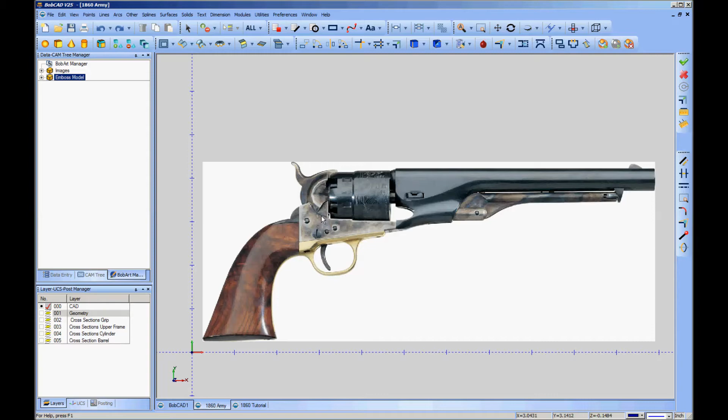The image that we're going to use in this case is one of a Colt Model 1860 Army Revolver. It's a black powder percussion revolver.

Using the basic drawing tools in BobCAD, we're going to draw out all the various parts. We're going to draw some geometry to reflect the topology of the part. There are some complex curves to be modeled here, quite a few of them that you can see.

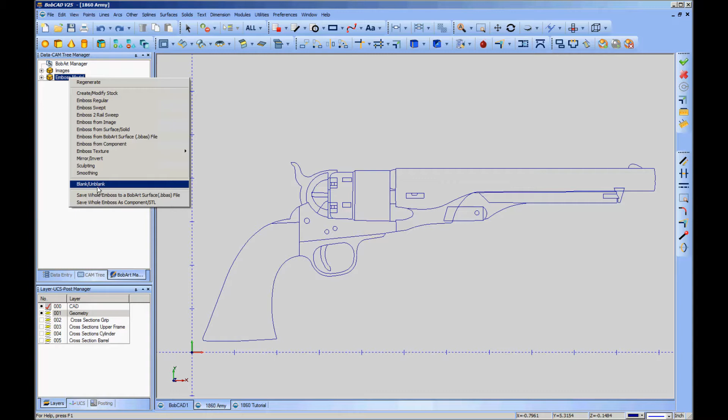Once we've done that, and we have a decent set of bones to work with, we're going to use BobArt, and only the basic BobArt, by the way. I'm not going to use Pro to actually do any of this, although along the way I'm going to point out some of the features of Pro. And we're not going to use every tool within BobArt to do this, by the way. I'd say maybe a third at the most of the tools available in BobArt are really even needed for this part.

But when we're done, we're going to have something very similar to this. This is the test piece, the one that I did originally, and I'll be drawing on my experience making this one to do the one that's in this tutorial.

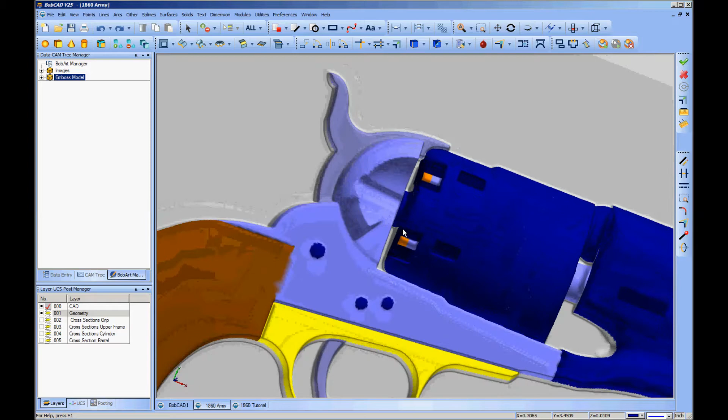As you can see, it's fairly detailed. I'm down to the percussion caps, the pins, the percussion cap chute there, the pins holding the barrel assembly to the frame, the charging lever. Pretty much everything a growing boy needs to go out and, I don't know, shoot at cans, I guess.

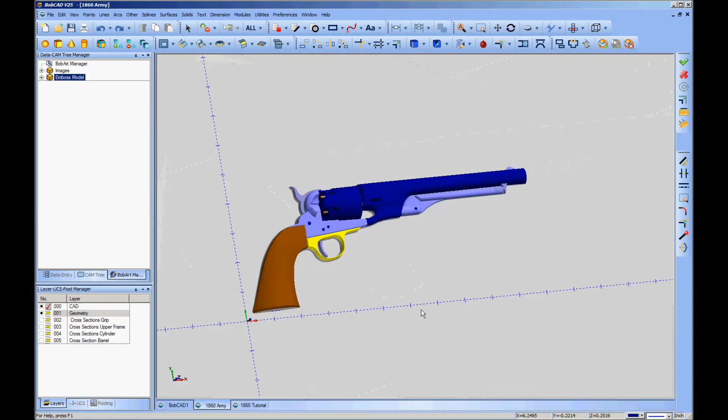Anyway, from here we will go on into the first part of it, which is going to be taking the image and delineating the parts and topology using the basic drafting tools with BobCAD. We'll pick it up there.

Alright, I've gotten started on the geometry for this piece. One of the first things I want to do is just discuss the tools that I'm using for this. They're the basic drawing tools, but this is the set that I find most useful for doing this sort of thing. I've got them set up in their own little toolbar over here.

I usually use them for cleaning up vectorized geometry. First of all, line sketch, simply drawing a line somewhere - nothing really to that. Quick trim is for getting rid of geometry when I cross two lines then join them, and I've got the tail left over. I'll use quick trim to get rid of that. It's very handy.

Break divide is wonderful - turn this off for those times when you join this point and only then realize, oh man, I've got to put an intersection down there because I've got to join this line to it. Well, you hit break divide, pick this large line, break it into two pieces. That gives you a vertex, which you then can take grab corner or drag corner, drag it to the appropriate spot, and there you've got a joining point for your line.

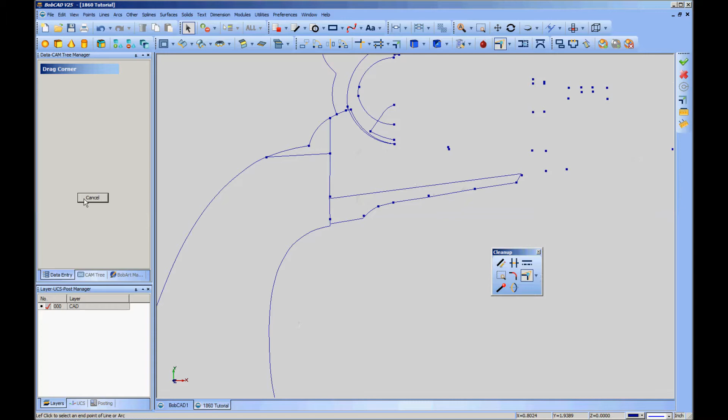That's very useful in places like this where you've got lots and lots of little lines intersecting to delineate the various points or the topology.

Let's see, the other things I wanted to mention, of course, line join, for when you've put that vertex there and you want to join it with the end of another line or a point that you've put in place to define this break between the two separate parts in the assembly.

And last, deform contour. Deform contour is incredibly handy when you can very easily spot a point here and a point here and join a line between them, and then using deform contour you can take your straight line and just drag it right out to whatever you need.

And that's the basic tools, and I keep them parked over here in their own toolbar.

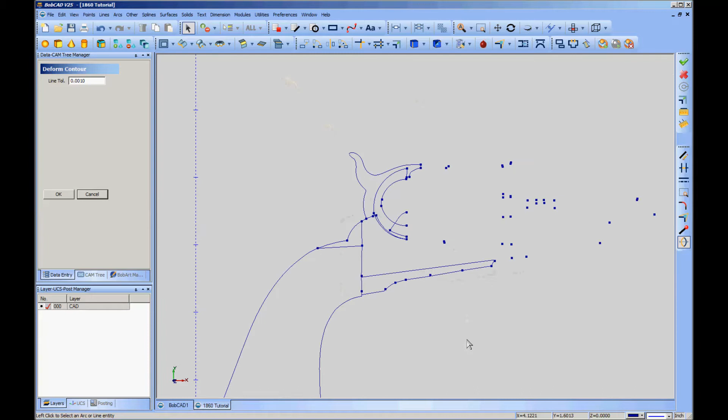Let me go ahead and show you where I'm at this point. I've used a few splines. I really limit splines to places where I know for sure they're not going to be broken, because when you draw a spline, in order to break it you basically have to explode it.

And what you get is a million little line and arc segments, and you don't need that. Nobody needs that. That clutters up your drawing - well, it doesn't clutter it up.

It basically throws a very large load onto your computer in order to lug around all those little parts. To the computer, this spline isn't really much more complex than this little piece right here. But if you break it up into 1,000 of them, that's 1,000 of these added to your drawing.

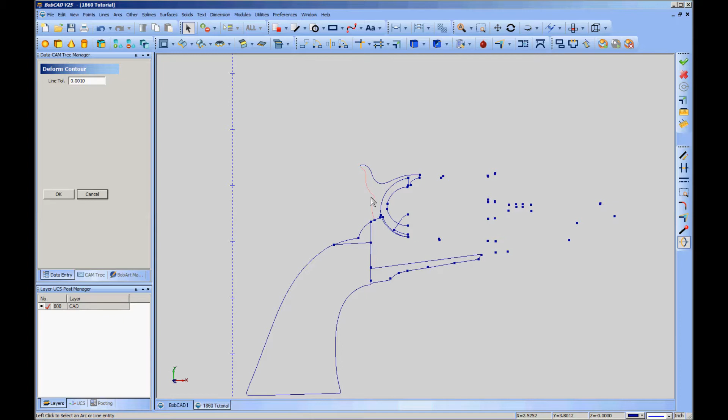So I'll limit that. I've got a spline here at the top of the hammer, one defining the back of the hammer, one defining the entire grip. I'll almost certainly make a spline to do the inside and outside of the trigger guards. Places like this compound curve on the charging lever is a good place for a spline. Also, this flat on the side of the barrel toward the rear will be defined with several splines, because I've got some compound curves that I need to define rails for an embossment there.

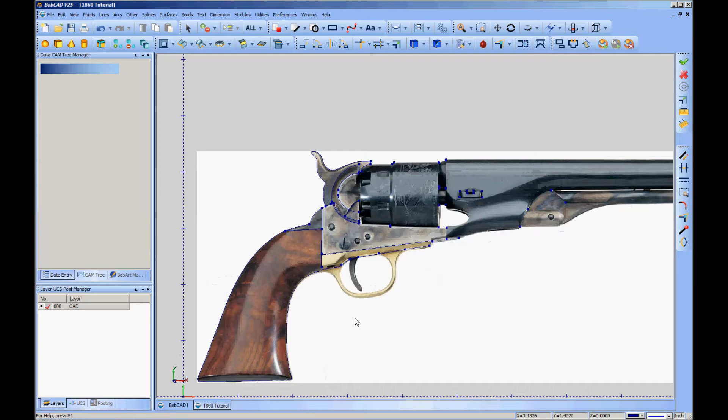Let's see. Alright, one of the things I wanted to talk about right off the bat is how what you're doing here differs from your normal CAD drawing. What you see right here is a bleeding mess. If this were CAD, I would deserve to get thrown out of the room for drawing that. It doesn't make sense. It's not something that you would do.

However, it does make sense when you're just putting down geometry for an embossment. If I'm going to define a curve... actually, let me go ahead—well, I don't have the setup properly for doing the embossment right now. If I were going to define this curve, which is essentially a spherical part that's been cut in half where the hammer comes into it, and it's got a scallop cut out of the side, the first thing I've got to do is define this curve, and then I've got to emboss it.

In order to emboss it, I'm going to emboss down below where this side plate goes, right through this area where the part is cut away. Later on, I'll take this roughly triangular area and have a separate embossment that will just mash it all down flat to the plane where my cursor is going. This embossment will ride up over the part that goes down along this line.

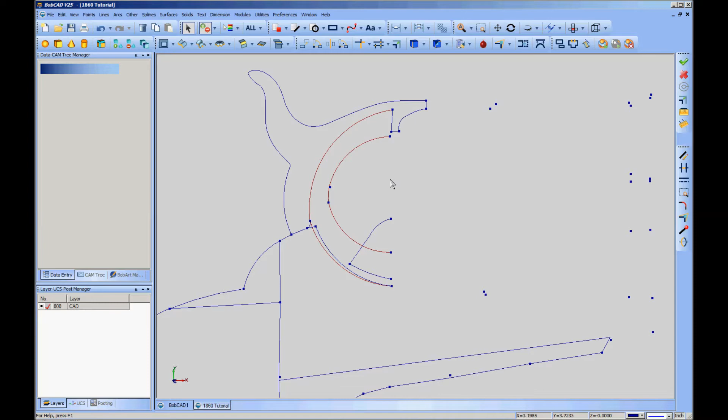So you run into situations like that where, in drawing out the part, you have to think about what all parts do I have, and separate them out into embossments mentally. So I've got this one embossment that is actually going over and impinging on not one but two other embossments. Inside that, I'll have a second embossment that'll cut out the scallop, and I'll even have a third one to take this little groove, which is the guideway for the percussion caps that fit down onto those nipples.

Oh, and while I'm talking about this, one other thing. This is a photograph of a modern Italian replica of an 1860 Army revolver. It's really faithful except for one thing—see that screw right there? When I look at a photograph of an actual Colt 1860 Army revolver, which is a pretty good photo, and I found this after I'd started the other one, there is no screw there. These pins are in the right place, but no screw. So I'm not going to have that as part of the embossment. I probably won't mention that again, but when you notice toward the end that the screw is missing from the image, well, that's why.

Okay, I'm going to go ahead and draw some more offline, because it'll bore you to tears if I'm just sitting there connecting lines and tweaking curves. And when I come to some interesting tasty bits, like when I start doing this compound curve especially, we'll come back in and do some more narration.

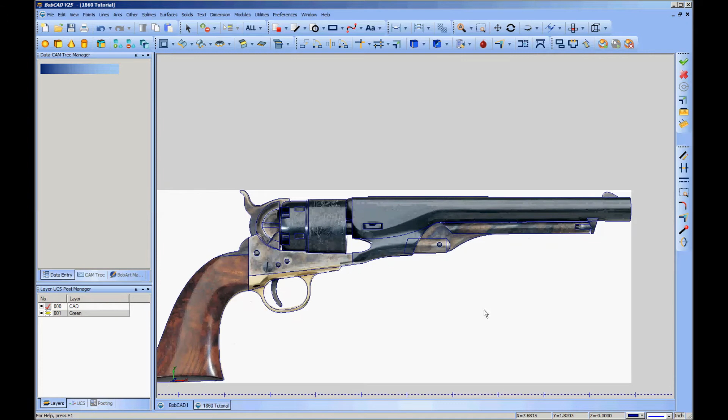This is actually a muzzle loading black powder revolver. A lot of people don't even realize these existed. But before the advent of the Smith & Wesson, I believe, actually did the first 44 caliber cartridges, and then Colt followed on very shortly thereafter. Until then, if you wanted a lot of firepower, you carried more pistols. You didn't reload in combat because you would be dead.

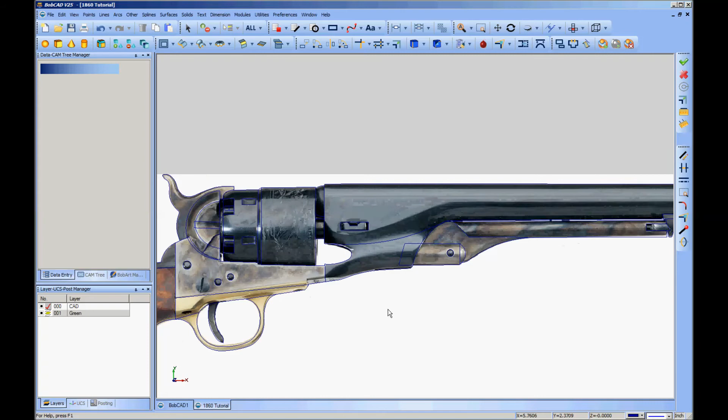Anyway, this plunger, in order to do a quick and easy embossment, I went ahead and pushed it within the frame, the geometry that is, because I'm just going to do a regular emboss with a convex arc. It would look funky back here if I just tried to stop it there, so I pushed it within the frame. The other thing to note is on this barrel, we've got several features that we've got to emboss.

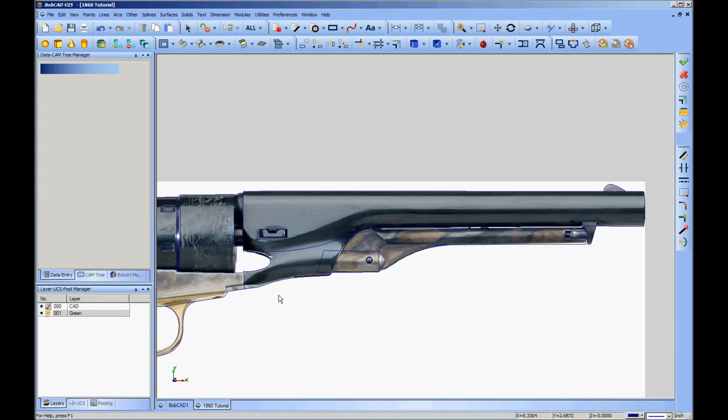We've got, of course, the round barrel. We've got the flat on the side here. We've got this concavity that runs fore and aft. And we've got a pretty inconvenient little cutout here. And all of that pretty well has to be modeled to make this look right.

So first things first, got the barrel drawn out, and I threw a spline in here that doesn't really correspond with anything. What it's for is, as the round barrel comes back, I'm just going to swell it all out, kind of pear-shaped here, full round the whole way, and it will be basically bulbous in here. I'll take another embossment and push it down flat, and then there'll be a third embossment, which will be basically this part here merging just straight over into the larger barrel piece. That'll provide everything except the concavity.

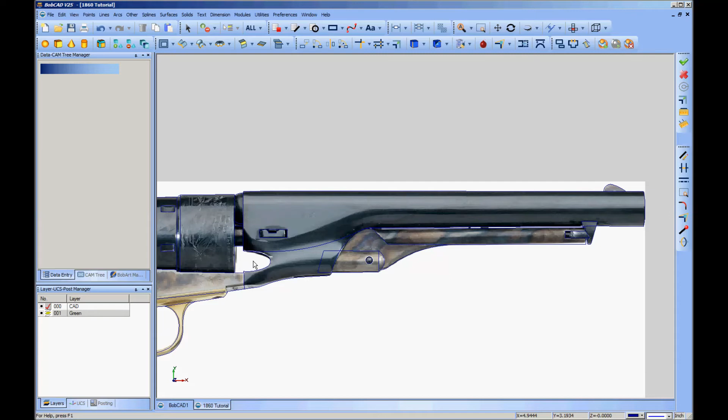That'll be a 1, 2, 3, fourth emboss will be the concavity, and then because of the way that will have to work, there will be some oddness going on here. I'll have to have a fifth emboss to just stomp that all flat, and it'll be an emboss, but it'll look like there's no emboss. So anyway, I've got the definition of the main barrel swell here.

Next thing I got to look at is this flat. Now the flat, obviously the barrel rounds over at the top, so the flat really goes there forward, more or less gets undefined here, but then it swings in and it follows this down. So in order to put that in, I've got a nice vertex right there that I can hook that one to. I'll take a spline up to here, and it'll be close enough.

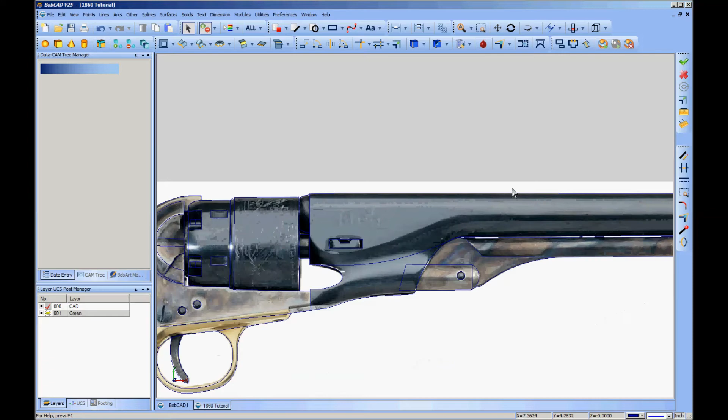There's lots of artistic license or just plain liberties taken with this. I very often say close is close enough. Really good case in point is I'm just going to make this a little billet stuck into the end of this lever instead of trying to model the little spring in there. It's not worth it. Not worth the time of the day.

Okay, so up here I don't have anything to anchor it to, so the first thing I'm going to do is use break divide to split that into two pieces, giving me a vertex I can play with. I'll use drag corner to drag the vertex up about there, and now I can go ahead and take a fitted spline. Holding down the shift key and clicking on that line gives me a vertex I can anchor to, and I'll just start lining right out along this curve.

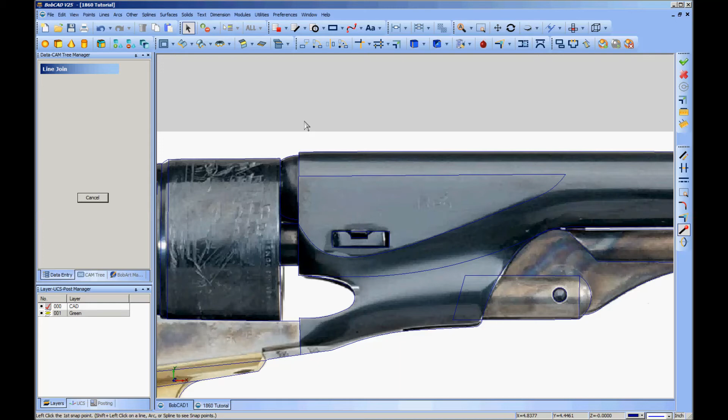I want to miss that securing pin because I will be embossing it. It gets a little undefined in this part, so I'm just going to curve up and right there. And the top part is a straight line, so I'll just use line join, shift and click, gives me a vertex, bring it out here and attach to that. So that defines the flat embossment.

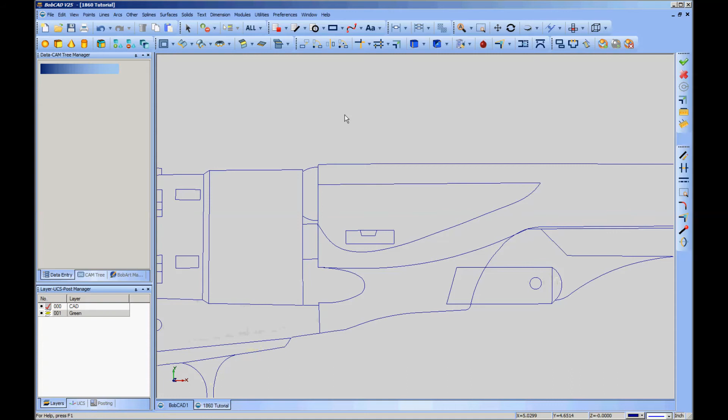Now, one thing I'm going to do while I'm at this is color code these, because I'm going to have a lot of lines in here, and it'll make it a lot easier if I can very quickly, just at a glance, see what's what. So these two, I'm going to select them, modify attributes, color, and we'll make them purple. Not a lot, but you can see it pretty easily.

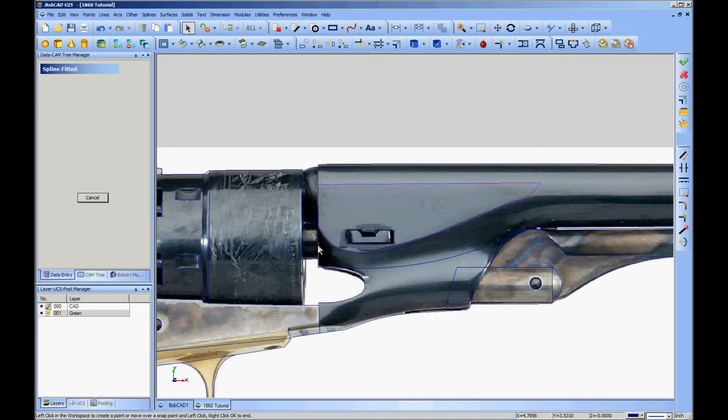Alright, the next thing is to define this piece here. It's going to have to go beyond this line in order to join. So we'll say halfway up that line to there. So I do have to use break divide. Click OK, and that gives me a vertex to anchor to. And again, we'll just use a fitted spline, holding shift to get the vertex.

And this can go way on in, it's not really an issue, so I'm just going to go straight across. Because it'll be color coded, I'm not even going to worry about crossing that pin. And when we get over here, holding down shift shows me the vertex at the end. I'll choose that as my anchor point. Click OK.

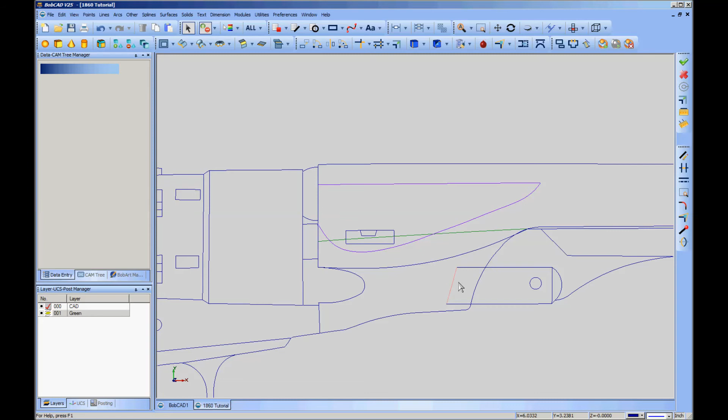That one I want to also give a color. So clicking on it, modify attributes, color, we'll say that's green. I don't have to really make all of this green. That just lets me know, okay, what's that all about? I look at it and say, oh, okay, well that must be the top of this whole little part here.

Lastly, I want to define two rails. The two rails are for the concavity here. And one of them could be this one, except that it goes too far and I don't want to break it, because as I mentioned earlier, breaking splines gives you lots and lots of little pieces. So I'm going to instead just draw another one almost on top of it, and I'll end it roughly there. And then I'll draw another one at the bottom.

We'll go from that intersection and just stop it here. These don't actually have to, no, it would be better if it did join something, so I'll go ahead and break that and give myself a vertex. And that's in the right place. So, alright, I'll go back to fitted spline. I'm going to start it in the same place.

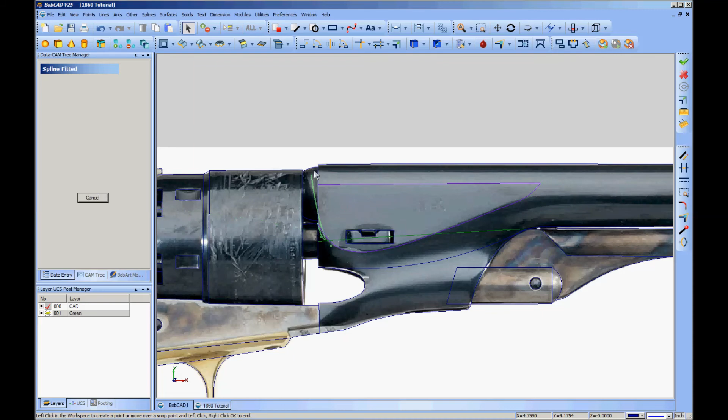Something is wrong. Try that again. There. And basically following, oh, okay, I know what's happening. When you basically touch one spline with another as you're drawing it, it causes some funkiness, so I need to be a little bit better at avoiding that. So I'll start there. And just make sure I don't ever have my other spline highlighted as I come around.

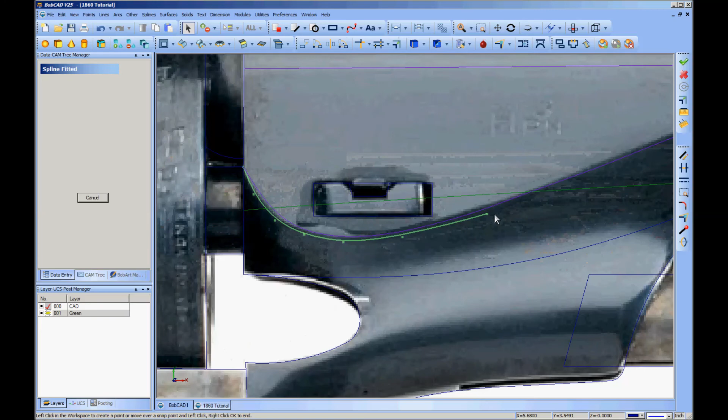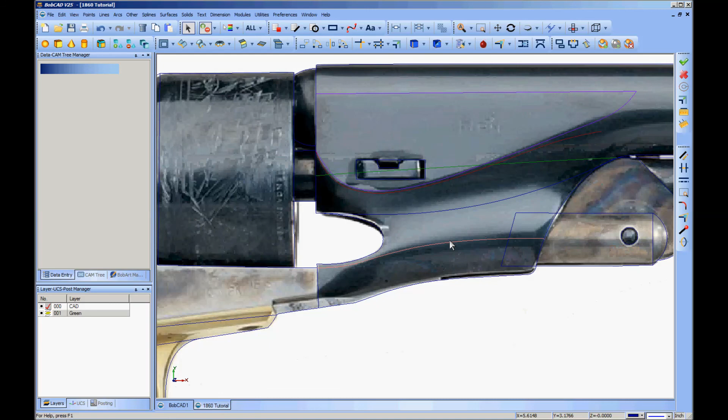And that'll do. So okay, that's my top one. Now I want to throw the bottom one in. We'll go from that intersection and just follow this ridge. And there's the intersection that I put in place for it. So there. Click OK. Now I want to select both of those and give them a color so that I know that they're paired, and we'll pick orange.

Alright, so now we're pretty well ready for this one. I've got my flat shown up here in purple. I know what that's going to be. The green is just the top part of this lower part of the barrel forging. That spline there is the lower part of the barrel swell, and then I've got a rail here and a rail here. They're going to define the concavity that gets embossed in there.

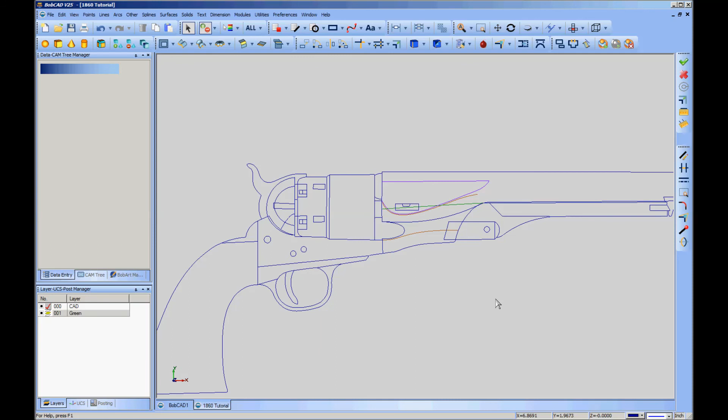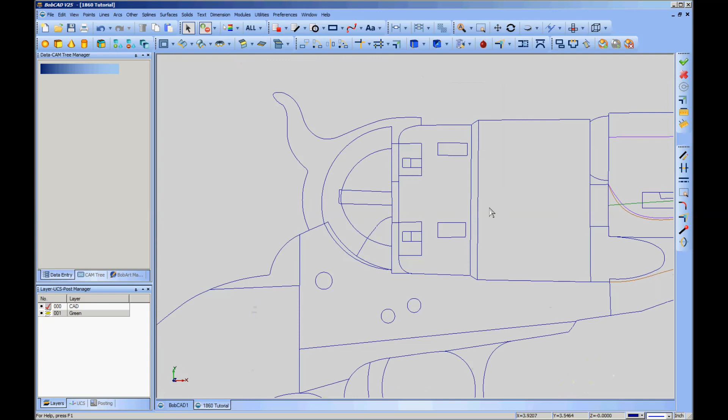And I believe that is going to do it. I've got lots and lots of stuff drawn in. You'll see one or two changes. I think I had a fillet there that I took out. I've taken one liberty basically with the major structure of the gun. You can see that part of the frame actually projects a little bit and the cylinder fits over it, and there's a pawl and ratchet system inside there. I had shrunk that down to a smaller axle, basically kind of an extension of this piece back here. It's not quite centered, but it's close enough.

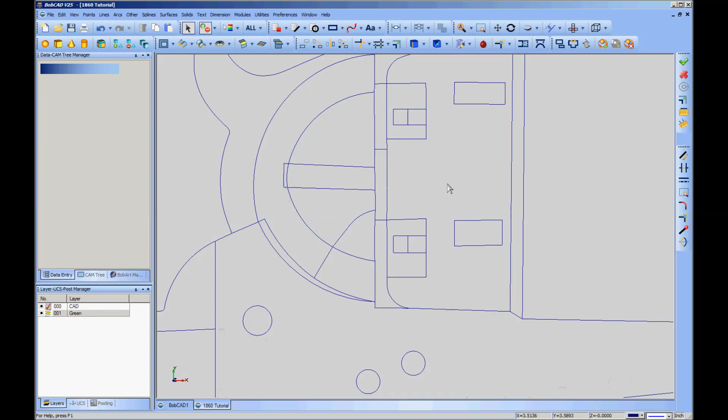The depressions here for the percussion nipples are close. They're not right on. I just kind of drew those in to make it look visually okay. But overall, that is what we're going to work with to get all our embossments. And we'll pick that up in the next video.